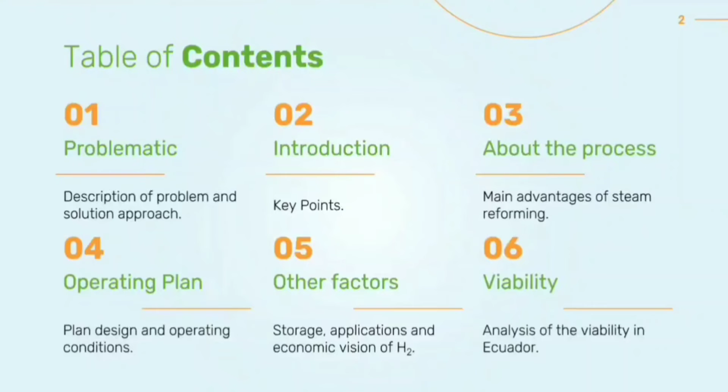Steam reforming plants to produce hydrogen have numerous advantages over other processes. However, they produce high emissions of carbon dioxide, which is very negative for the environment. Our group has the potential to compete with new technology, taking care that you as a company have the greatest possible benefits. But how will we make this possible?

We will do it with a membrane separating system, also called adsorption desorption. In addition, recycling is implemented with the adsorbed gases, which become part of the tail gases. These gases are recycled to the burner so that the greatest amount of the product is used, generating benefits for the factory.

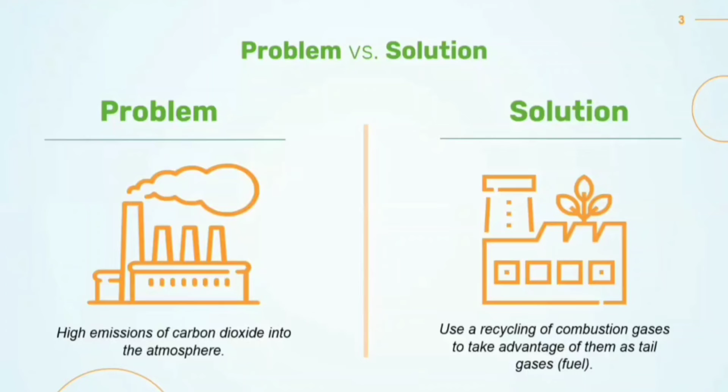Hydrogen is considered the most efficient, non-polluting, abundant, and profitable source of energy for the immediate future. The production of hydrogen gas can be obtained from raw materials such as natural gas, ammonia, biomass, and others. The most used technology for the production of hydrogen is steam reforming using light hydrocarbons as raw materials.

Generally, the use of paraffinic materials such as natural gas, which contain methane, is required to avoid the conversion of more polluting materials. In Ecuador, large amounts of methane are produced daily in different industry sectors. Reforming is a highly efficient process based on the conversion of hydrocarbons to simultaneously produce hydrogen, carbon dioxide, and carbon monoxide.

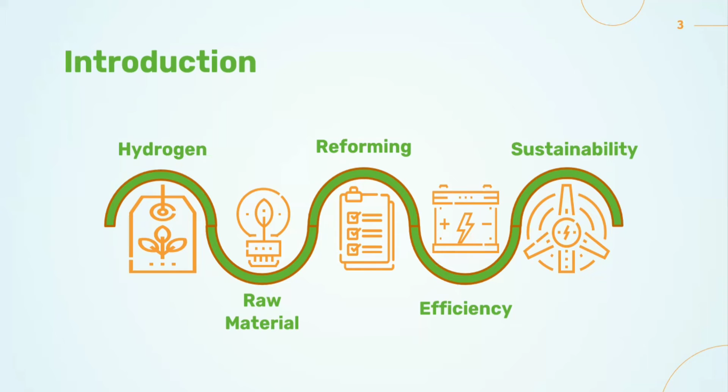It's a clean fuel because the chemical energy stored in H2 is released when it combines with oxygen in the air, producing only water as a product. We note that steam reforming to produce hydrogen has several advantages over other processes that use hydrocarbons or other raw materials. It's a renowned method in the industry, and it has been commercial for a long time, demonstrating its effectiveness.

On the other hand, this process doesn't require oxygen, and its operating temperature is lower than in the others that use hydrocarbon fuels. Steam reforming produces a hydrogen to carbon monoxide ratio of 3:1, which is considered high. And its efficiency is higher than other hydrogen production technologies, proving to be the best alternative.

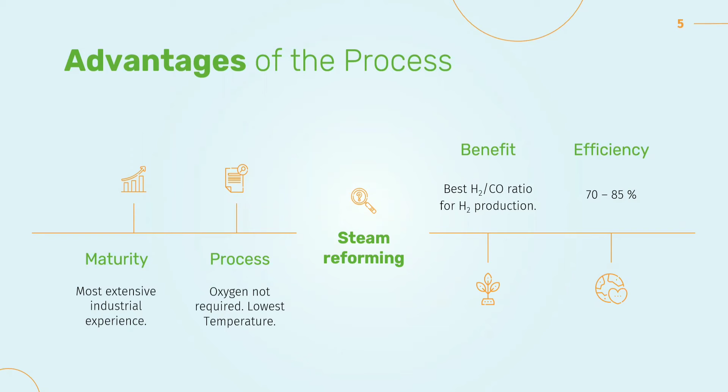The process starts with natural gas and water. The natural gas goes through a desulfurizer and then to the nickel catalytic bed reformer where the reaction of methane and water takes place, forming carbon monoxide and hydrogen. The off gas is directed to the CO shift unit where carbon monoxide reacts with water to produce carbon dioxide and hydrogen, producing CO2 emissions. The heat released is used to preheat the natural gas as it enters the reformer.

The gas produced is rich in hydrogen and passes through a condenser where water vapor is removed and then to a PSA system that works at high pressures on zeolite and obtains hydrogen with a purity of 99.999%. Gases other than hydrogen are adsorbed and constitute the tail gas, which is also fuel and is recirculated to the reformer burners.

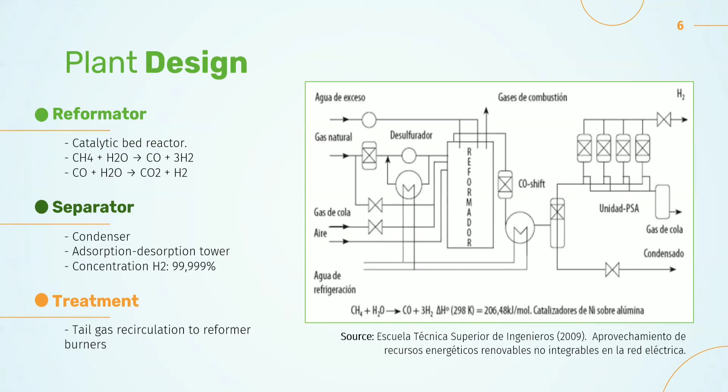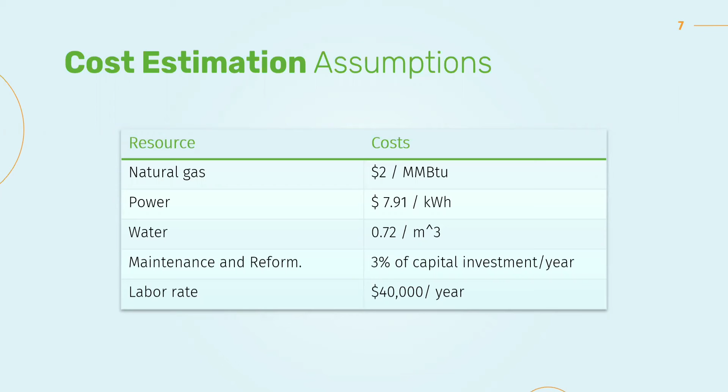Estimated costs were based on Ecuador rates. Natural gas costs $2 per million BTUs. Energy costs $7.91 per kilowatt hour. Water costs 72 cents per cubic meter. Maintenance and refurbishment costs are 3% of the capital invested per year, and the labor rate is $40,000 per year.

For the process to be efficient and to guarantee a methane conversion of around 92%, the following operating conditions must be met. The process will be strongly endothermic. The catalyst to be used will be nickel, which is less expensive and increases the conversion of the process by 5%. The reformer must work at a temperature of 1200 Kelvin and a pressure of between 20 and 30 bars.

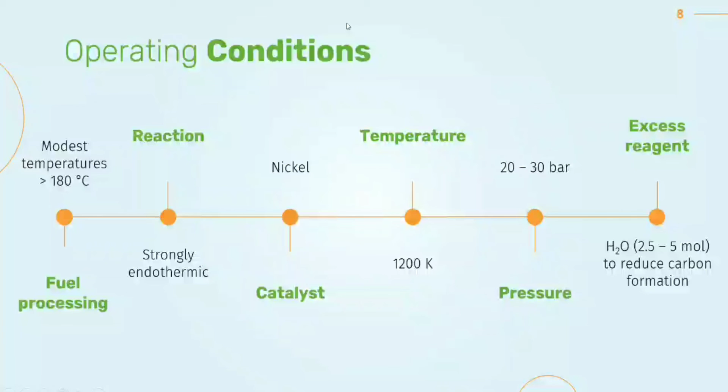Theoretically, the correct thing to do is to use a water requirement equivalent to the stoichiometry, but we will use an excess at a rate of 2.5 to 5 mol of H2O per CH4 to avoid the formation of carbon on the nickel. This is very important since if this scenario is not avoided, the heat transfer is reduced along with the productive capacity of the system. Next, we will meet other factors that are involved in our proposal.

First, the conservation of the product of interest, which is hydrogen gas, taking into consideration that in most processes the use of hydrogen in the gaseous state is required. It is necessary to store it at high pressure. For this storage type, it is required that the tanks meet two characteristics. They should be heavy and bulky. In addition, it is necessary for safety in the processes of storage, distribution, and loading of hydrogen.

However, hydrogen can be stored in a liquid state using a cryogenic container. This vessel needs to resist very low storage temperatures. Second, the various applications that hydrogen has at an industrial level. Hydrogen is used in various industrial processes. However, the main utility is in the chemical industry, in hydrogenation processes or as a reducing agent. It is also used as aerospace fuel, in water treatment, and as liquid coolant.

Finally, there is currently a new application that is fuel cells, which involve an energy alternative, generating an overview of a hydrogen economy. In this factor, the production of green hydrogen is projected as a way to meet the energy needs of society, since hydrogen can be generated from renewable sources.

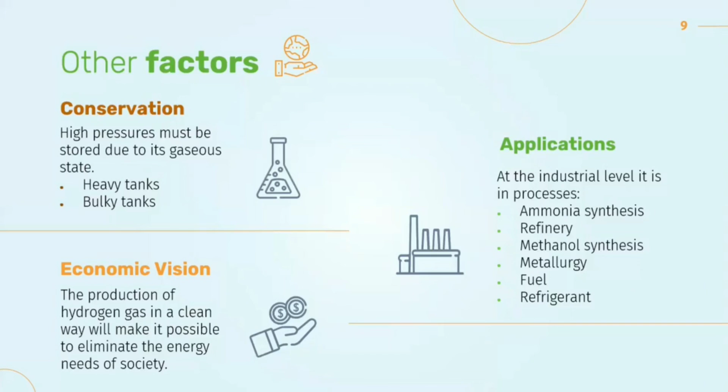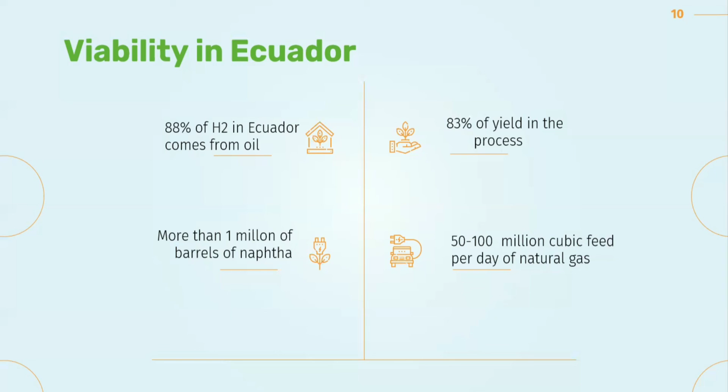On viability in Ecuador: 88% of hydrogen comes from oil. The main process of obtaining it is reforming. The conversion yield in the water vapor reforming process is 83%. Ecuador in 2020 produced more than 1 million barrels of naphtha and more than 1,000 barrels of LPG. Ecuador produced between 50 to 100 million cubic feet per day of natural gas.